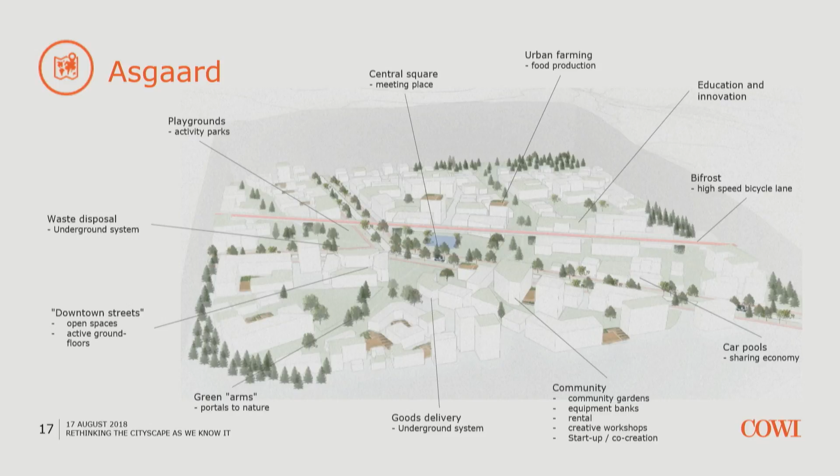But first, Hedda will tell us about the master plan. Yes, and this is the master plan called Asgaard. I'm just going to take you through the main points of the plan, because traditionally cities have been planned for cars and other types of transit above ground. But we have tried to turn this perception of a city upside down, and change the passenger transportation, the delivery of goods, and the waste management, putting all these functions underground.

So basically we have designed a city for pedestrians and bicycles. By placing all these functions underground, we have been able to create a lot more space for recreation and social and green areas. The only infrastructure left above ground is a main route for emission-free and autonomous buses and cars, an express road for bicycles, and paths for slow-running bicycles and pedestrians.

Because communities with a good overview and proximity to nature are what attracts people to villages, while cities have other benefits, such as diversity of people, services, and access to a large labor market, we have tried to combine all these qualities and blur the boundary between urban and nature.

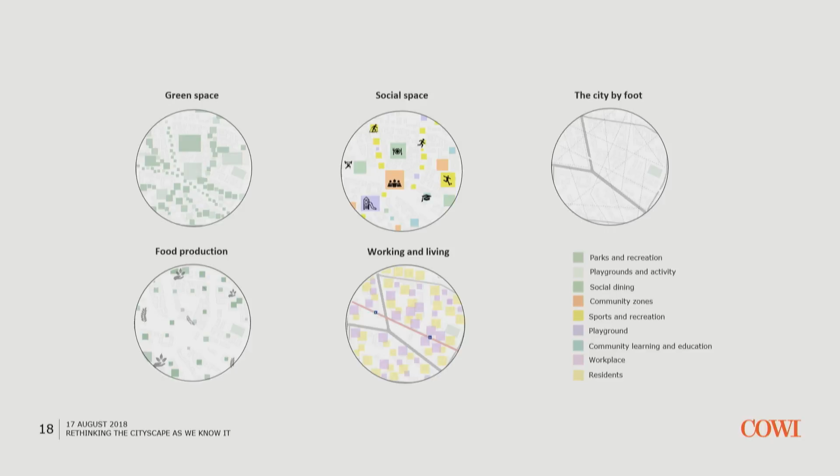Okay, so in order to give the streets back to the people, the plan focuses a lot on social spaces and an environment where it is easy and rewarding to get around by bike or by foot. The neighborhood has a common meeting place to strengthen unity, as well as a variety of spaces for public and private green areas. The streets are also designed to provide a lot of options when moving around and function as social arenas. Concerning residents and workplaces, these are mixed together close to the center so that we can reduce the need for transportation.

So basically we will live more dense and closer to work, as well as to a lot of other functions that you need in your everyday life, all within walking and biking distance. And now Tobias is going to introduce you to one of our solutions for biking through the city.

Thank you. Okay, so as Lone mentioned in the intro, our main solution for the transportation of people is called Bifrost. Bifrost is going to be also the main transportation corridor around Solihugda. It goes around the city in a loop, and it should ideally go through all the small centers and connect all the neighborhoods, placed so that it's always within a reasonable walking distance.

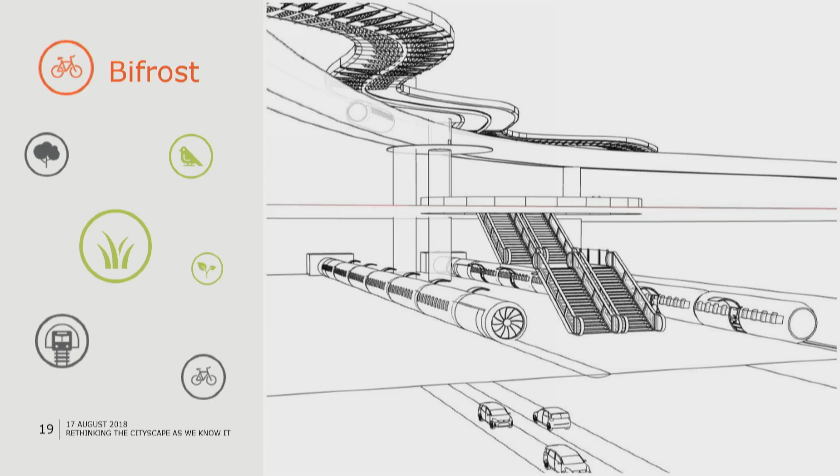It's elevated above the street level by pillars. You can see here, this is the street level, and this is Bifrost. The pillars have integrated elevators that can take you up to Bifrost with your bike. Some of the pillars will be used for urban farming, which we'll get back to. And the pillars can also go down into the ground and connect Bifrost to a hyperloop connection between Solihugda and Sandvika, or even an underground road tunnel system if that's implemented.

So the public transportation tube is sort of like a metro. It travels in both directions, very fast, and only stops on demand at the platforms, and it's automated. It travels in a glass tube so you have a great view of the city as you're traveling, and we'd like it to travel in a vacuum by magnets so it can travel very fast and efficiently, which also reduces noise, vibrations, and maintenance on the train.

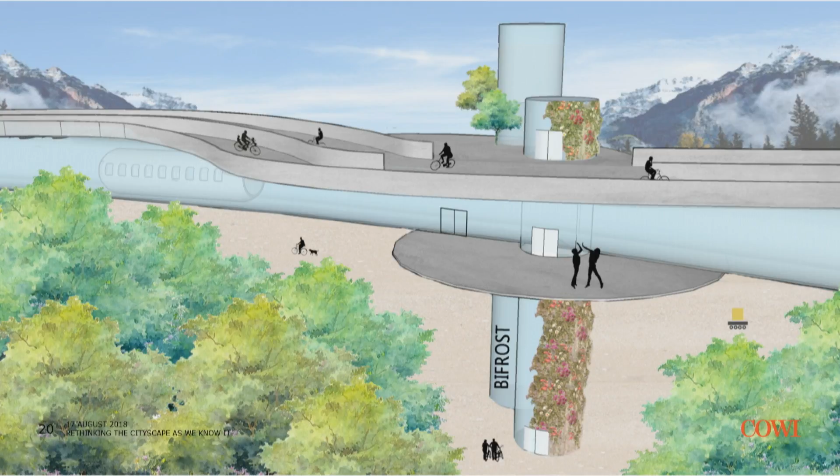Above it, on the roof of the tube, there is a bike path, an open, wide bike path, sort of like a bike highway. It has sensors along the way that monitor the weather, so when it's raining, snowing, windy, or cold, glass walls at the sides can slide up and connect at the top to shield you while you're biking. So it's attractive even in winter, again with a great view of the city as you're biking very fast.

And now over to Eline. The bike path is made from recycled plastic that lasts 2 or 3 times longer than asphalt.

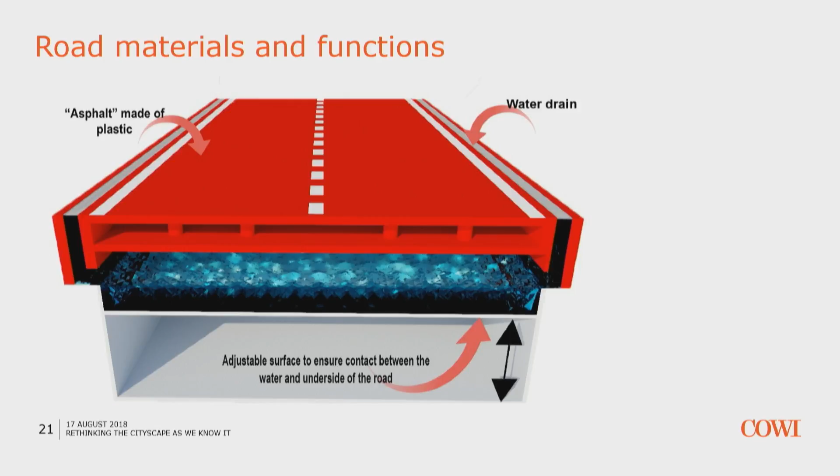On rainy days, the shield collects storm water, and the water is stored just underneath the bike path, as you can see in the illustration. During winter and cold weather, the water can be heated, which ensures the bike path doesn't freeze. The water is collected in a storm water system and heated, generated from combustion. The road for the self-driving buses and cars has the same system and works the same way, so snow won't settle on the road during winter and you don't need to remove it. It just does it by itself.

Yes, and for the released space, we thought about, among other things, urban farming. We're going to make use of all the newest technology. There will be stormwater collectors on the roof, which make sure the fields get the right amount of water, and of course there will be the right amount of UV light, generated by solar panels.

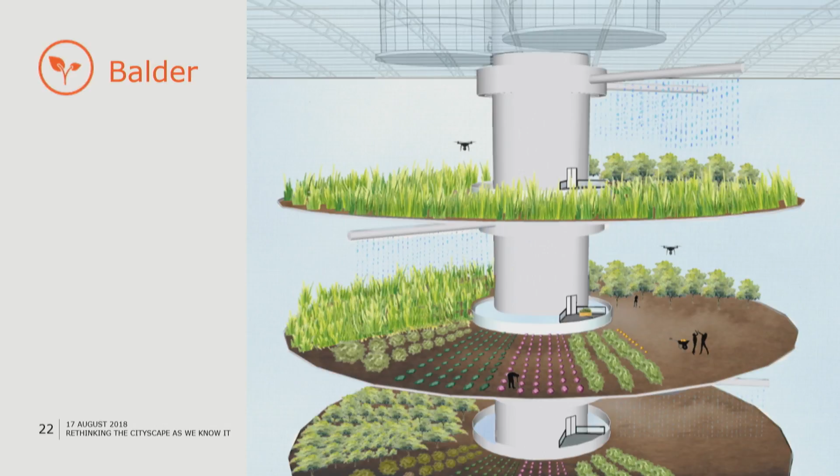And last, we have an introduction for our city. So we decided to explore a computer game called Cities: Skylines to see if it could give any added value to our project.

First of all, Cities: Skylines is a city simulation, similar to SimCity, and it makes you build, run, and modify a city. The game has some really cool features to it. For example, it lets you walk the streets from a citizen's perspective, so you can really feel the surroundings in a different way.

A key takeaway from the game is that it could be used as a tool for participation and public involvement, by, for example, arranging workshops or contests. This was actually done in a Finnish city called Hämeenlinna, or something like that.

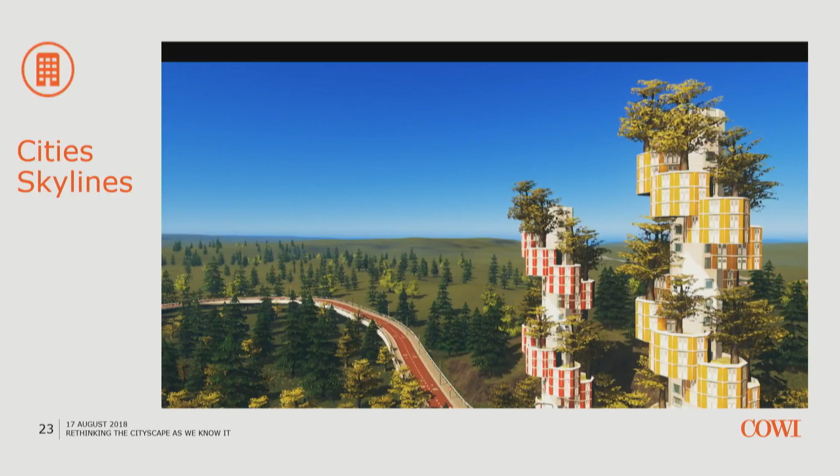They had an area they wanted to develop, so they made a map with the existing city, and left blank the area they wanted to develop. Then anyone could download the map and build on the empty area.

So to end the presentation, we will show you a 30-second peek of our creation, and it might give you an idea of how it is to ride a bicycle on the Bifrost.

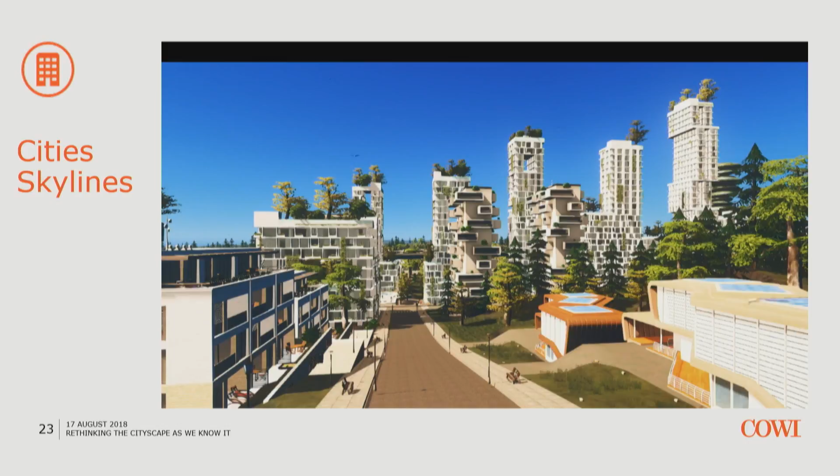Wasn't this cool? You'll just be standing here, and I'll hand over the microphone to the feedback team. Who wants to start? Lars-Erik?

Yes, Lars-Erik, by the way, he's the Business Development Director for Transportation within the Transportation Division. Please. Thank you, Group 1. I'm really impressed by your work within this limited time during this summer.

I think your master plan was very visionary. There are a lot of new ideas, and I also like the link to the Norse mythologies. That was really impressive. And in some parts here, I also got a flashback to the series Westworld, in a very positive manner.

And I also found this not just a solution for Sollihøgda. I can see that this could be a basis for creating new cities all over the world. So, but what I'm a bit curious about: were you all in agreement during this work, or did you have some tough discussions?

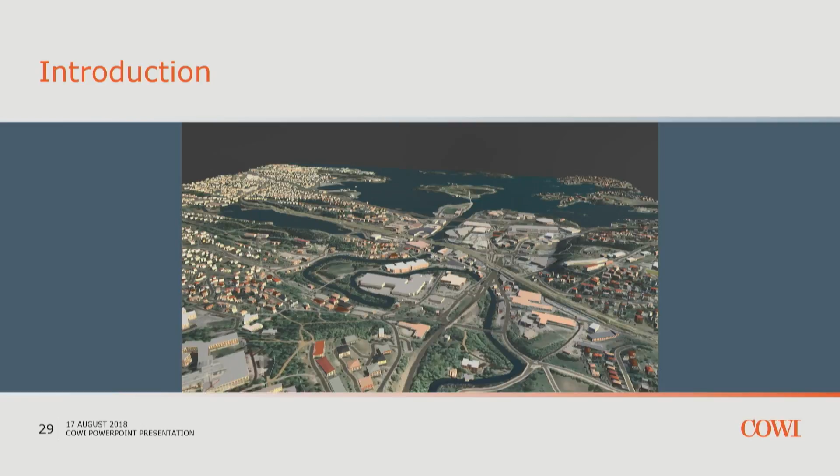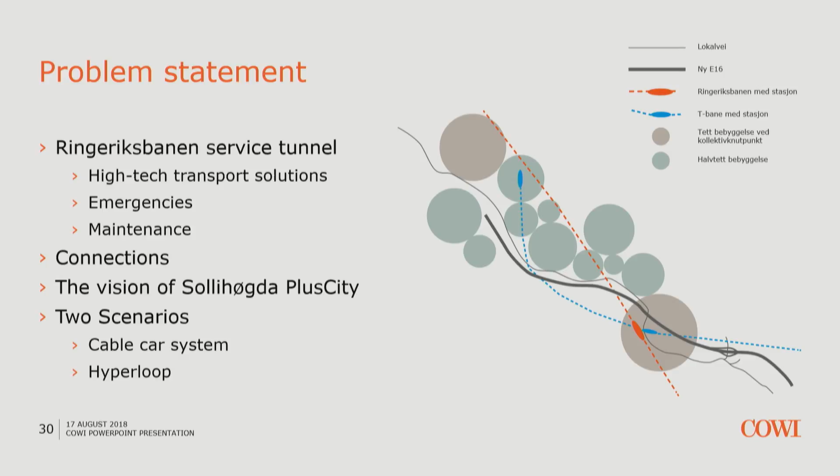So this is a service tunnel, it should still maintain its original function. We were trying to find solutions that were effective in bringing people from Sollihøgda to Sandvika, while at the same time maintaining the function of doing service for the railway tunnel, as well as supplying firefighting opportunities and escape routes if there's any emergencies in the main tunnel. We'll also look at how we connect this solution to Sollihøgda and Sandvika, as well as making it fit in with the vision of Sollihøgda. We wanted to use the vision of circular economy and plus energy as well.

And we have two scenarios that we will take a look at: cable car and hyperloop. I'll give it over to Andreas. Yes, so our first solution and idea

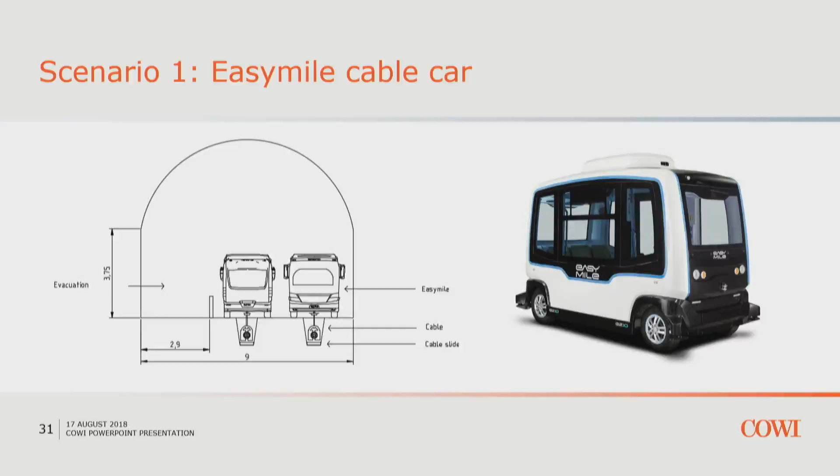focuses greatly on co-usage of the service tunnel. Its main purpose is originally to evacuate people in case of emergencies, and also for service by Bane NOR, who builds and services the tunnel. So we came up with the idea of combining the Easy Mile autonomous electric buses with something perhaps not so innovative, but reusing old technology for newer purposes could be innovative in itself. So we have a cable car system, which is a cable embedded into the pavement of the service tunnel, stretching the path going all the way from Sollihøgda down to Sandvika and back up again in a circle. And the buses connect to the cable and are dragged along.

So we can achieve quite a bit higher speed than what they usually have. Those Easy Miles shown in the previous slide have a top speed of 45 kilometers per hour. We would expect at least 100 more for this system to be viable. And of course, being an electric vehicle, as most electric vehicles have, they have something called regenerative braking, where when you go down a hill the car brakes, and by braking it charges its batteries to some degree. So if we combine that, the cable car system drags the bus, and it also uses regenerative braking to charge the batteries. This means they can go continuously without having to stop for charging at any point.

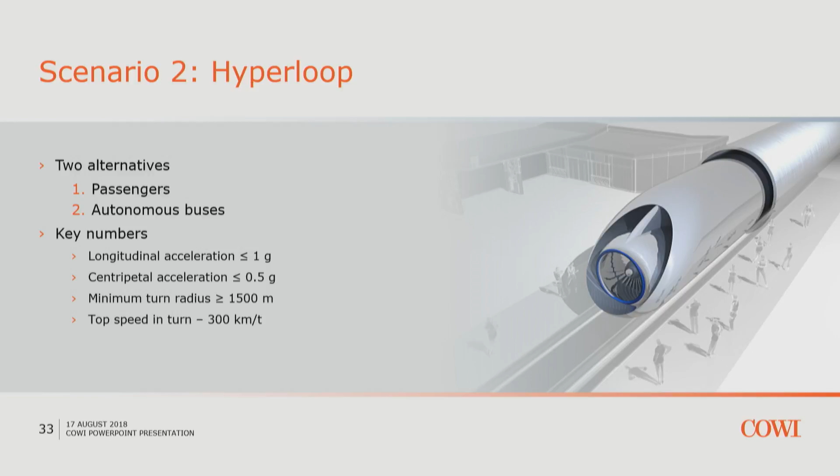This one we have actually used, because the last turn into Sandvika has only a turning radius of 1,500. We investigated this, and it means you need to keep a top speed of 300 kilometers per hour in this turn, which makes it a little bit harder.

This is some of the main consideration, because from Sollihøgda to Sandvika it's only 13.5 kilometers, and you need some time for it to accelerate up to top speed. There's a trade-off between speed and comfort when you have this short distance.

So I just brought some key figures. We took the longitudinal acceleration a bit down to 0.5, which is still a lot. As you can see, if you reach a top speed of 300, you would have a total travel time of 163 seconds, where most of the time you're at constant speed, which means it's comfortable. But if you increase it to 500, you only get about 25 seconds less travel time.

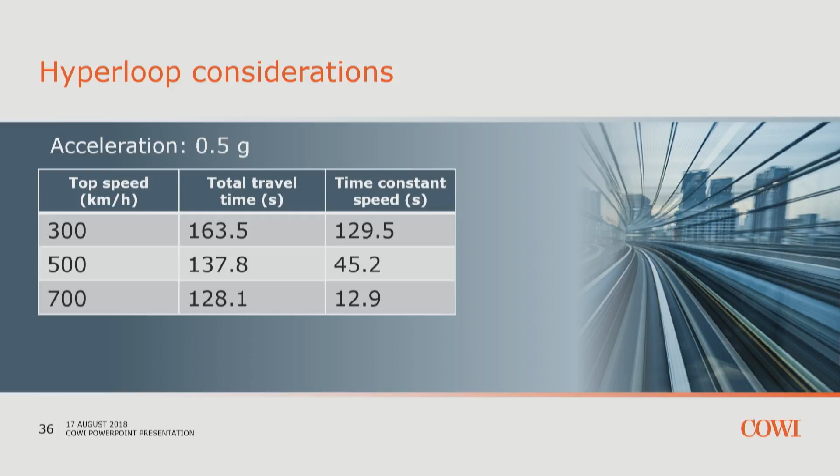And you reduce the amount of time considerably where you're at constant speed. As an extreme here, you've reduced the travel time only about 9 seconds from 500, and only 12 seconds is at constant speed, which means you're spending most of your time accelerating and decelerating, which is not very comfortable—you just sit there. So this is the trade-off when you have this short distance. Even though the theoretical speed is over 1,000 kilometers an hour, it's not viable on this stretch.

In the next slide, please. Here we have a model of the station at Sollihøgda. This is underground, about 200 meters below the surface.

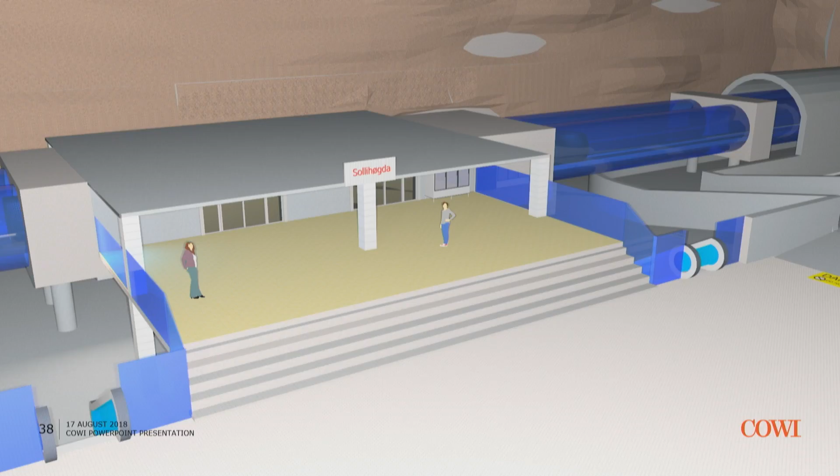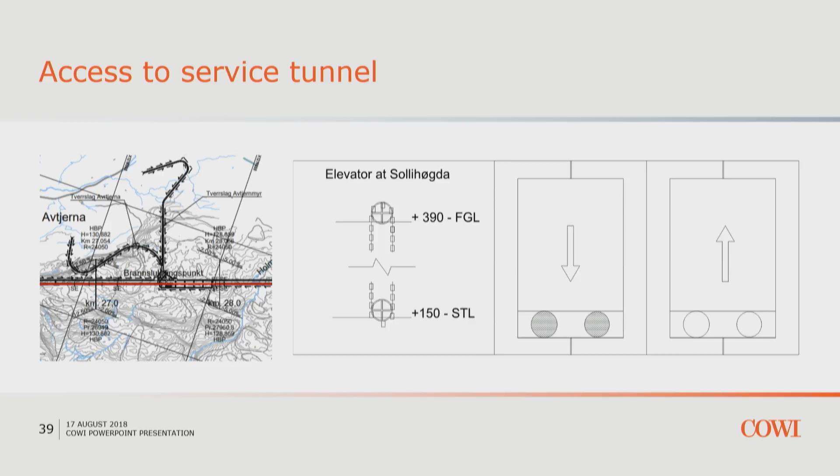Yeah, and I think we have quite a few slides left. We're using up most of our time, so we'll just - are we on time now? We're done.

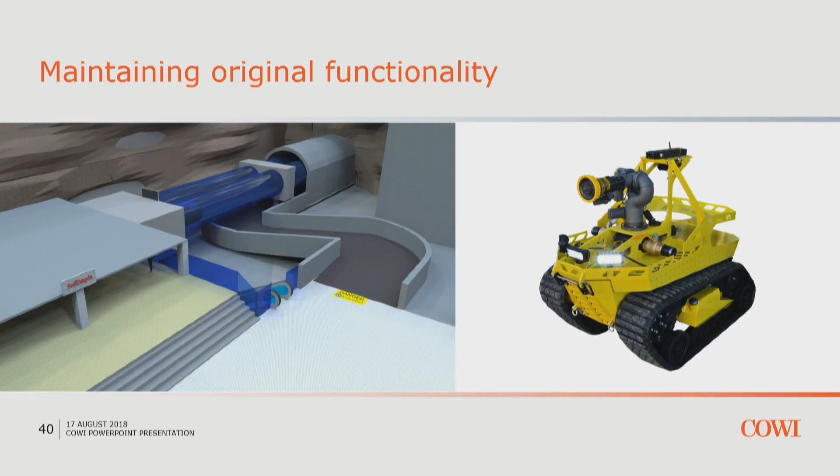Okay, blast through it. So this is because of the Hyperloop - we are short on space, so this is an idea for a remotely operated fire vehicle.

Okay, so this is quite important - we wanted to fit this in with the vision. So we imagine a sophisticated urban runoff system inside Sollihøgda, where all household wastewater and urban runoff goes to the same treatment plant. You could store the water in basins, and since there's a large height potential - pressure potential of over 200 meters - you could implement hydropower to help power the Hyperloop, and leftover electricity could be sent back in the vision of plus energy.

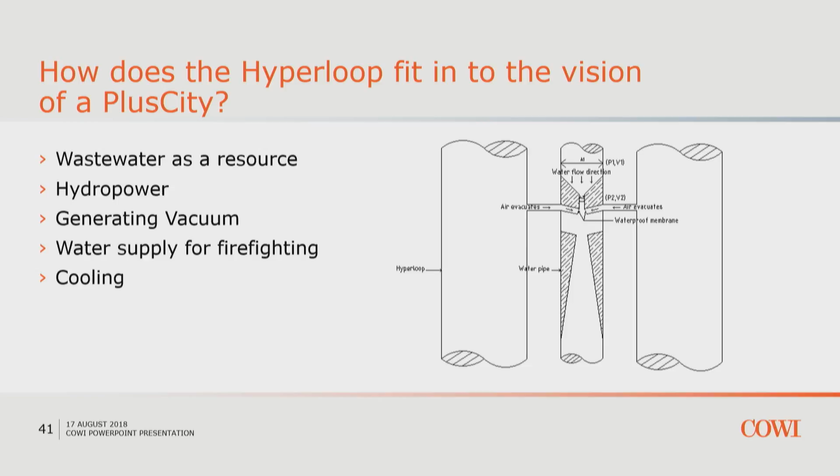We also have a solution here using vacuum. This is a simple Venturi vacuum jet, where water flows from a large cross section down to a smaller cross section, and when it suddenly increases in cross section, you generate a vacuum, creating suction that could help suck air out of the Hyperloop. This could minimize the cost of maintaining vacuum in a Hyperloop. It could also help supply firefighting, and be used for cooling of machinery and other solutions.

And we have a future consideration, but I think we'll just skip that, I guess. Sorry.

Get ready for the future. You know, amusement parks - nothing compared to Hyperloop.

And I also must say that we have been trying to get in touch with Elon Musk. We've been tweeting with him, trying to reach him, but I think he's rather busy with his own company these days.

So, Lars-Erik - thank you, Group 2. I'm also impressed with what you have been sorting out this summer, and I find this very realistic. It's not only visionary ideas, but you have been working and taking into account the formal barriers, like the service tunnel has a primary function, and you've taken this into consideration in your work. That's very good, because I think Bane NOR has some thoughts about a solution like this.

But also in a cost perspective, I have read your report as well, and the use of service tunnels wherever they are - the infrastructure is already there, and you can easily implement a Hyperloop system. But my question to you is, after working with this all summer, do you believe in this? Is this possible?

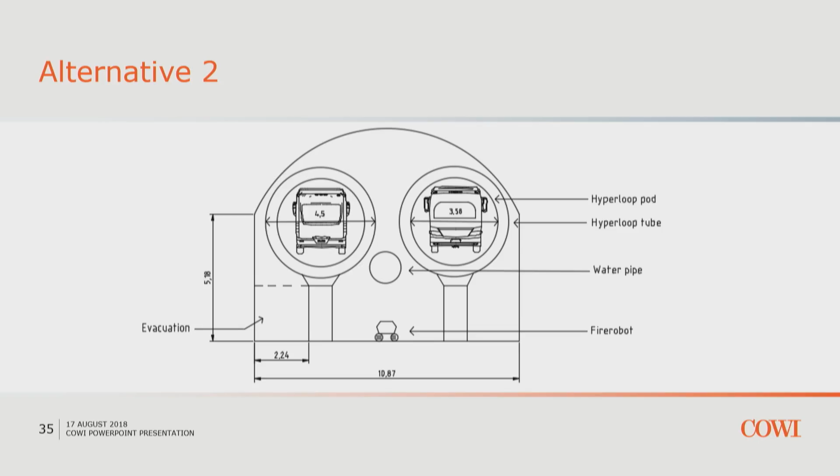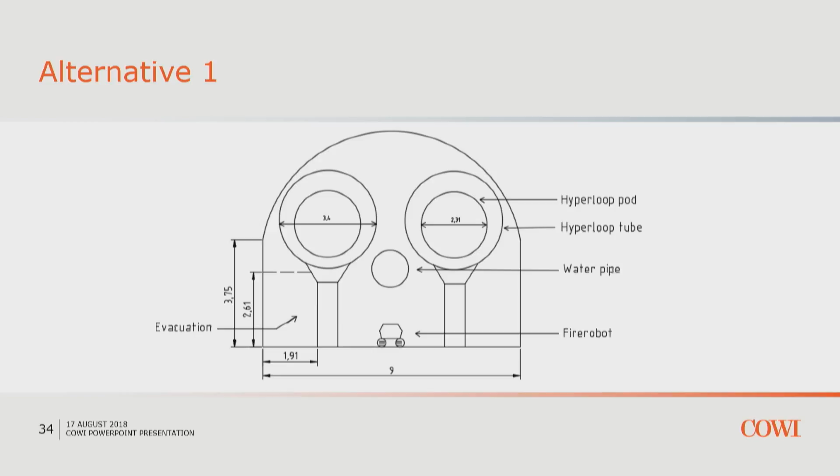Here you can see, the requirements for escape route is 2.25 in height and 1.4 in width. So we've taken that into account and made the pillars of the Hyperloop fit that. And the fire robot is also very small, and you would have a lot of them. We also said we wanted to have caverns for maintenance equipment that's stored there permanently.

Could anyone enter the Hyperloop on the way, or could they enter any other transport system here to evacuate the people stuck in the system? I mean, Bane NOR, I guess, would like to get people out of the area. That was the question - did you consider that?

No, we tried to consider that, but one of the reasons it's elevated, the Hyperloop wouldn't really need the pillars if we could use the tunnel as a tunnel. So fitting a vehicle for transportation might be difficult in these scenarios. For the first scenario with the EasyMile buses going down, we can utilize almost all the space by just having the buses move to the side, and they could even be used for evacuation purposes. Exactly, being autonomous, they could be programmed to be. Very good, thank you.

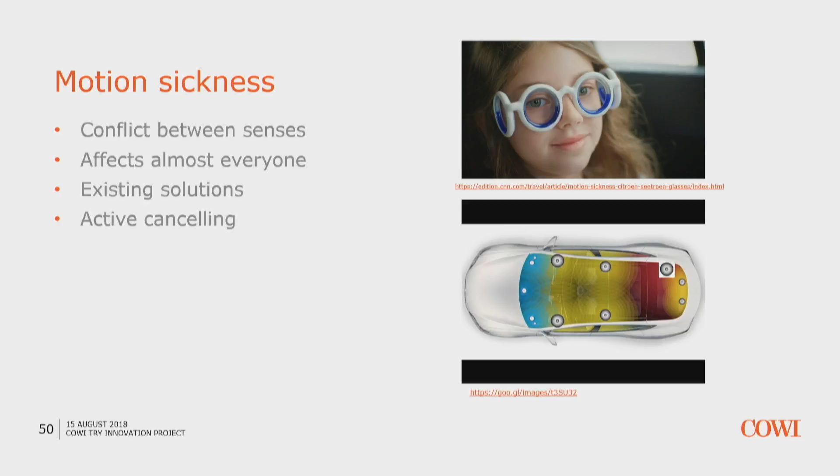So we have made a solution which, if it's viable, we think is way, way better. Instead of giving the eyes the simulation of motion, we want to give the balance nerve the simulation that it doesn't move, that you're standing still even though you're in a car. So using audio or vibrations, maybe even from the car seat, we're going to send adaptive waves into you according to the car's motion, which will neglect or reduce the feeling of motion sickness. So yeah, it's like active noise cancelling, but for motion instead of noise. That's the plan.

But the most important part is that the bikes are available. If you have used the bicycles here in Oslo, you probably have noticed that most are either full or empty, for example on top of a hill or at the bottom. So as Eirik mentioned previously, we want to use the AI buses to redistribute the bikes between rush hours, so they'll know where the bikes need to be when people want to travel. So you'll never have to bike around and look for places to park the bike, or vice versa.

But what if you worked outside your part of the city, or maybe even in a different city, like for example Oslo? The circle, as you can see, is more or less the same. The only difference is we added another step at the bottom called the mobility center. At the mobility center, it could for example be an autonomous bus taking you somewhere else within Sollihøgda, or it could maybe be a different kind of vehicle.

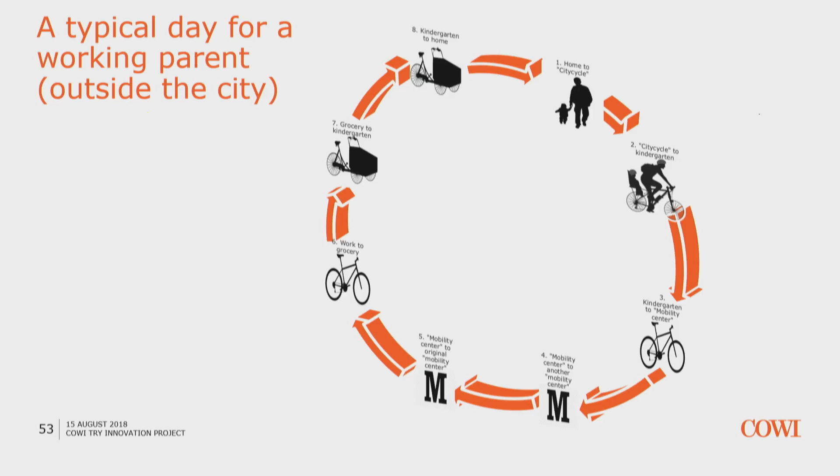So you may think now that we talked with group 1, but we didn't. We actually came up with the idea of bicycle highways. One of the challenges with biking and walking as well in larger cities is the flow of your biking. Most bikes will probably be electric in the future, and since these electric bikes give you the opportunity to go even faster than you do today, the bicycle highway can change the flow of biking since you're able to avoid typical stops, like for example a traffic light. This will, of course, increase the speed of biking and save time.

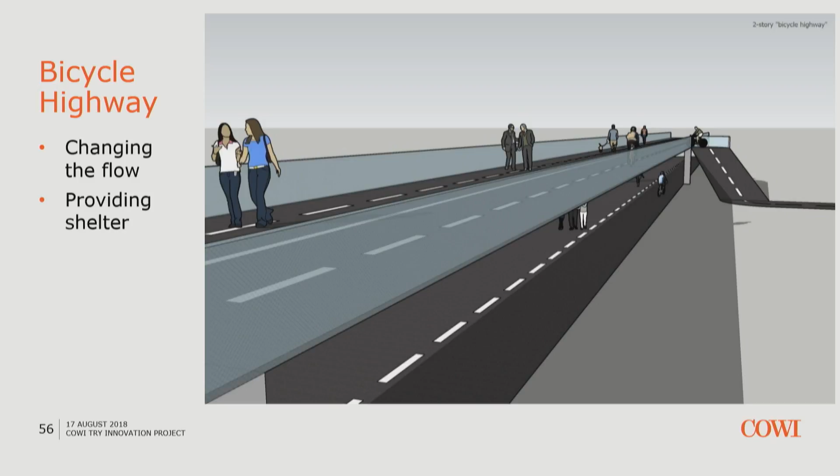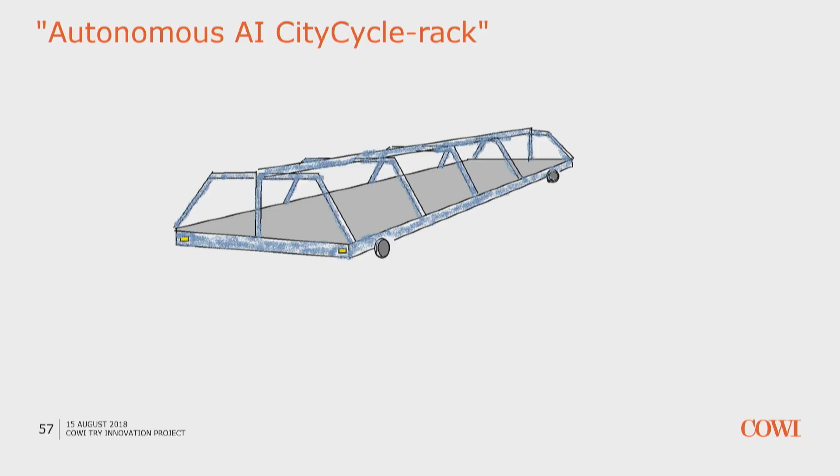And Ole will talk about another future consideration. Yeah, as you may see, this idea is not yet fully developed, but the main point is that instead of having the buses redistribute the bikes, we want the racks to be able to move around and pick up and deliver bikes all over the city. This means they can also move to hotspots where the need is especially high for bikes. So, yeah. Any questions?

So, thank you so much for that.

So here we have the feedback group. I think the bike idea is quite good here. I would like to have a bike that's changing during my day, so I think that's a good idea. Of course, it will be a lot of logistics to have this. Will you combine it with some types of sensors telling the systems where people actually are?

So actually the idea of the bike rack, for example, could be that it's AI controlled as well. So the bike racks would know which bike is needed or which type of bike is needed.

Yes, thank you for a very good presentation. I'm wondering, you have lots of how the bicycles are going to work with the AI buses. How have you discussed how you got people actually to use it? How are they going to? Is behavior going to change for people to use this and actually believe in it? Have you had that discussion?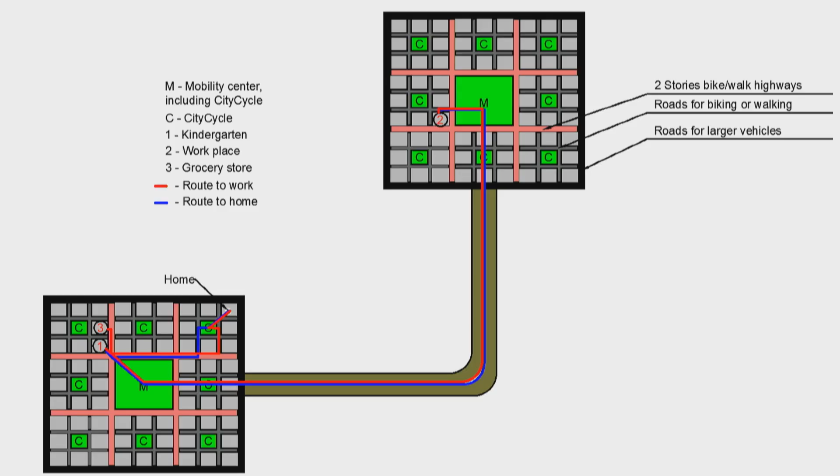They should just know where the need is. Another thing we were considering is that there will be parking restrictions, so it would be faster to travel by bike around the neighborhood than to have a car. In this master plan we didn't show the parking spots, but in general we were talking about the neighborhood being free of cars, and if you want to park a car you need to put it outside the neighborhood.

Yes, thank you for your presentation. I liked a lot of your technical solutions, especially the artificial intelligence with autonomous vehicles talking to each other. But also that you got more into the disadvantages of new technology, like motion sickness. We should be aware of the disadvantages that new technology will create. It's almost the same as Janne, because I also read your report, and I think you write some of it there, because it's not only about the technology, but the human touch.

Changing attitude and changing behavior, going from car to other more environmentally friendly vehicles. I wish you could present some of your thoughts here in your presentation, because you have written it in your report. So if you have something to add about that.

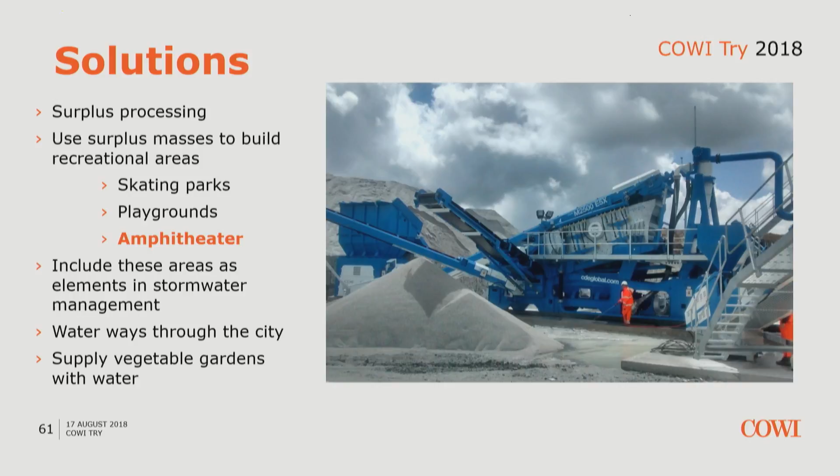In order to maintain a zero-emission building site and the profit of local use, we have to process the masses locally. You cannot just go and build a new processing facility anywhere you start a building project, so the solution would have to be a movable facility. But today, movable facilities are really expensive, and the return on investment is really slow. So what we need is a new technology that allows us to make cheaper facilities, easy to move around without affecting the capacity.

Like Emilia said, we would like to increase the demand for using these surplus masses. We are focused on recreational spaces and increasing the quality of living in Sollihögda. At the same time, we would like to utilize rainwater and stormwater in the area.

To solve this, we were inspired by skating parks built in Oslo where the skating parks are combined with handling and managing stormwater. We have extended this idea into a system of recreational areas and parks, all connected with waterways between them throughout the city. This system is supposed to handle both short-term management of heavy rainfall and also long-term storage of water in order to have a stable supply of water for drier periods.

We have pictured many different recreational areas, but one main element here is an amphitheater that we imagine being built at a central location in the town. We have talked about taking the cars away and giving the streets back to the people, so we are also going back and looking at some old ideas from ancient Greece.

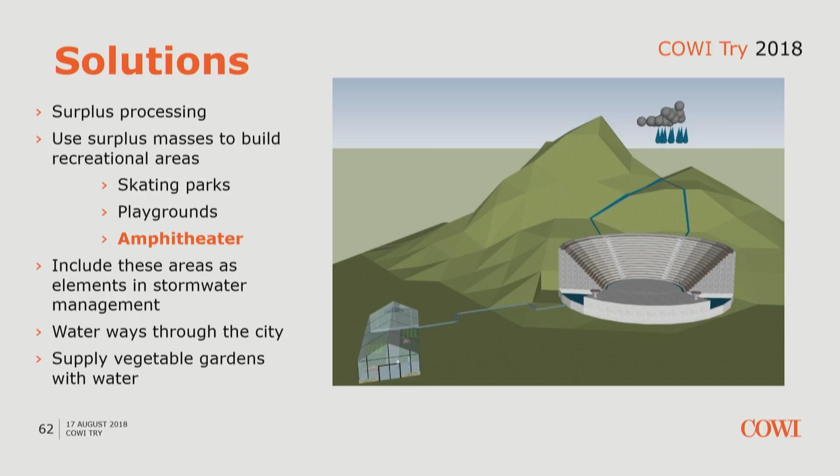We can see a short video here showing the amphitheater, if it works.

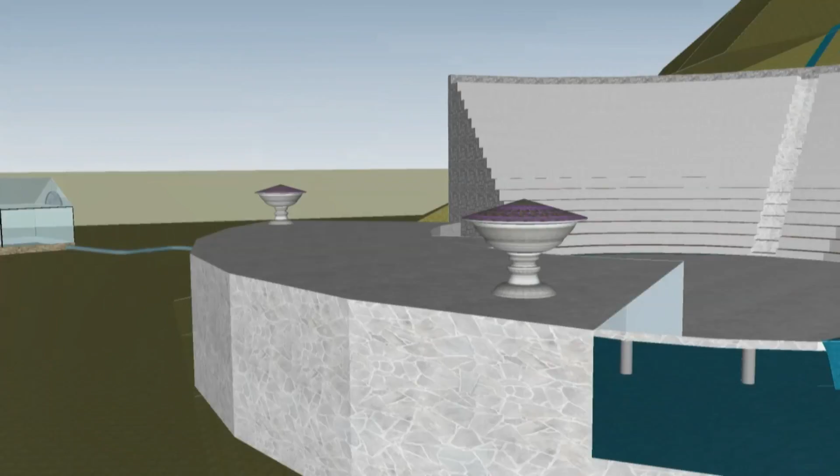Here we see rainwater coming down, and we can also connect existing waterways in the area into our system. Here is the amphitheater, where you see the pool underneath the stage, and there is also an output of water here that goes into other areas of the town. Here you can see a vegetable garden, which is served with water from the amphitheater.

The next slide is a map of Sollihögda, and it shows how we think this can be implemented. The blue lines are the waterways through the city,

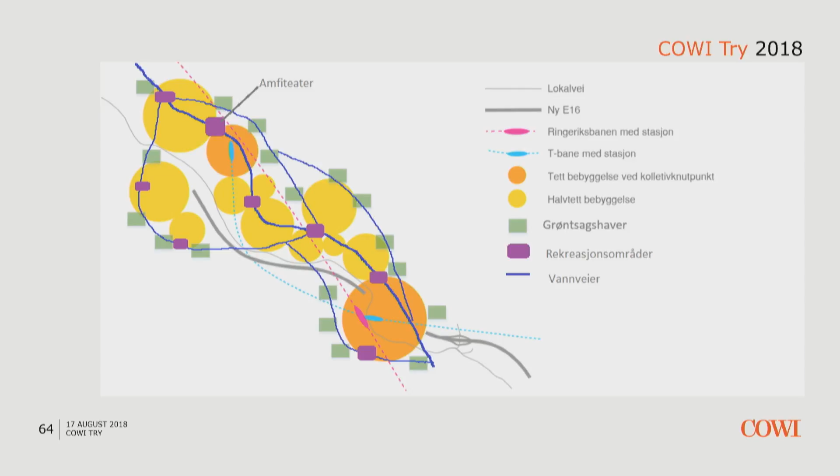the green dots are the vegetable gardens, and the purple ones are the different recreational areas and parks. We think that the running water itself is a positive element in a city. It makes the parks better, and it's a good element. The number of parks and gardens can be adjusted, but our idea is that it should be easy access to these areas everywhere in the city.

This is one of our other ideas, which you can see it's a lot of small gardens, gathered in larger communities. So the idea is that it should help circular economy and help get the whole mentality of using local goods rather than getting stuff that has had a lot of transport.

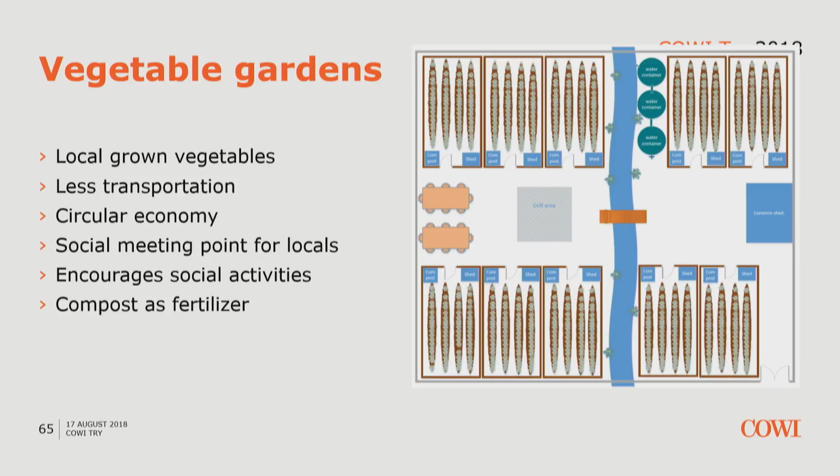So in the idea, we thought that each small slot could be rented by a family or just someone owning an apartment in Sollihögda, and then they could grow vegetables in them for food consumption, much like a sports club. The difference between this and just doing it back in your own garden, which a lot of people would have the ability to but aren't doing, is that here they could meet a few times a week. Maybe growing vegetables is a boring chore, but if you meet up a few times a week and tend to your garden together, it might be a fun thing to do.

And then you could use the middle of the community as a recreation area. We would like to have these gardens placed close to densely populated areas, just so that people's everyday waste could be used to make compost, which could be used as fertilizers.

A big part of this is getting the locals engaged in it, because if it's not a good social place, people are probably not going to spend a lot of time on their garden, and the productivity is not going to be very high.

Another thing to consider is the size of each slot. It will vary on how much is reasonable, how many vegetables each family should produce a year, if it should be their whole consumption, or if they should just cover some of it and buy the rest in supermarkets. Then, as in the video, we had animated the greenhouses as the green gardens, as a greenhouse. So it has to be considered whether it should be a greenhouse or more an open garden, which would be easier to make from surplus masses from the infrastructure.

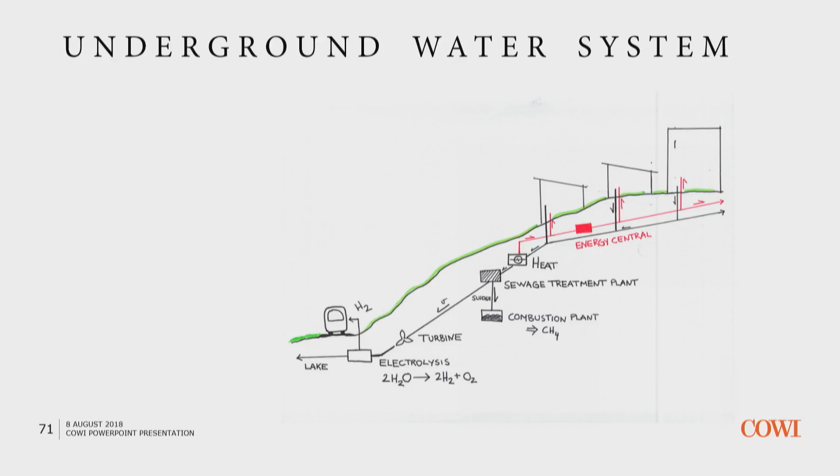Next, the water will run down the hill, creating kinetic energy. This is where we'll use Kaplan turbines to transform the kinetic energy into electricity to support the energy grid of the city. But we also wish to use some of this electricity for electrolysis, where water molecules are split into oxygen and hydrogen atoms. This hydrogen can then be used as emission-free fuel for the buses and cars of the city. At last, the rinsed water will just run off into a lake nearby.

What's important when creating a plus city is using solar power. We want to do that with PVT panels, a combined solar panel with a thermal solar collector, and we want to build these throughout the entire city, on buildings and roads as well. We also want to use transparent solar cells in the windows to use the window as an energy source.

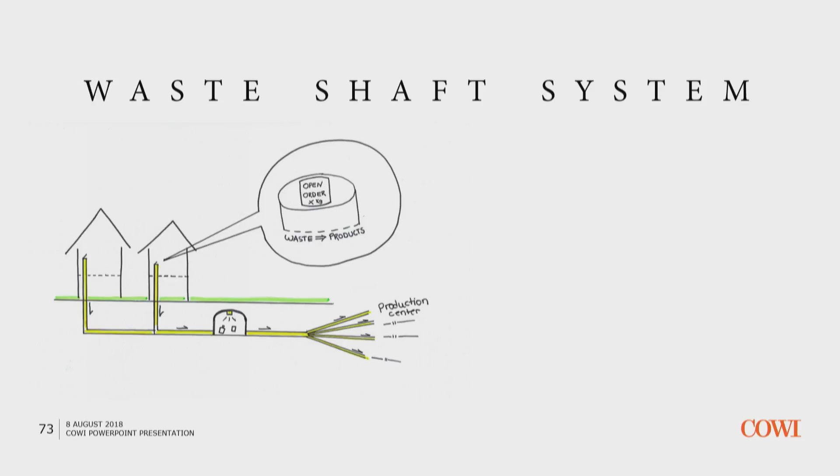Our idea is that we have a waste shaft integrated in every household, where all types of waste are thrown in. This waste is transported underground, where sensor technology sorts it out, and the waste is put into different pipes to be transported to recycling units. These units have their own production center where new products are made. We also want to make people more aware of sustainability and their own waste production.

We propose two features that come with this shaft. Firstly, we have a weight sensor integrated in the shaft that weighs your waste every time you put something in. There's also a computer tablet integrated in the shaft that gives you your monthly waste and shows you the average waste in Sollihögda. This will encourage you to waste less.

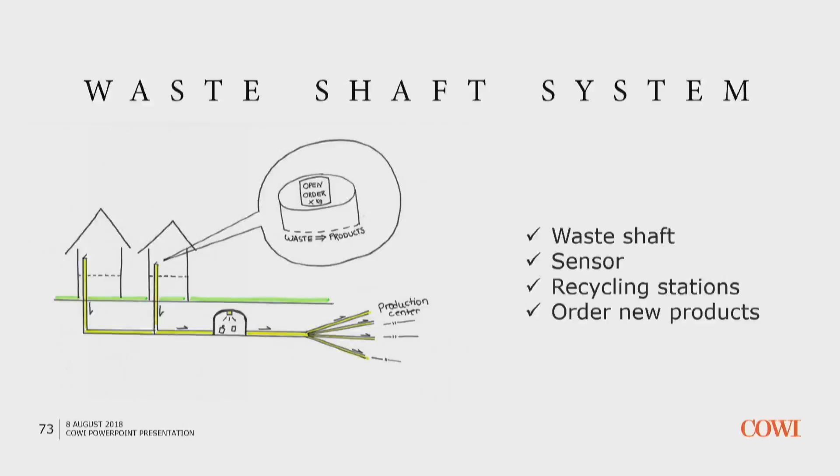We also want you to be able to order new products from this tablet. So this is the waste shaft: sensors, recycling stations, order new products. By this, you simplify your waste management, and recycling will no longer depend on us, but will be taken care of by machines.